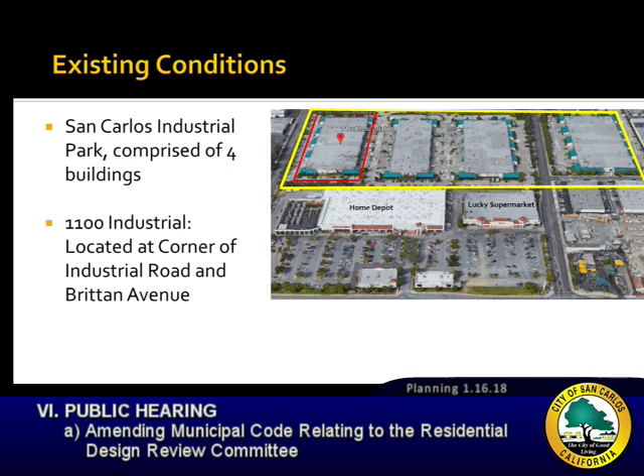The general plan designation is planned industrial, which allows for a variety of light industrial and flex uses. The zoning for the site is a planned development zoning, established through Ordinance 988, which requires a conditional use permit for recreation uses.

Surrounding land uses include industrial and commercial uses, and the surrounding zoning is general commercial and industrial, as well as planned development.

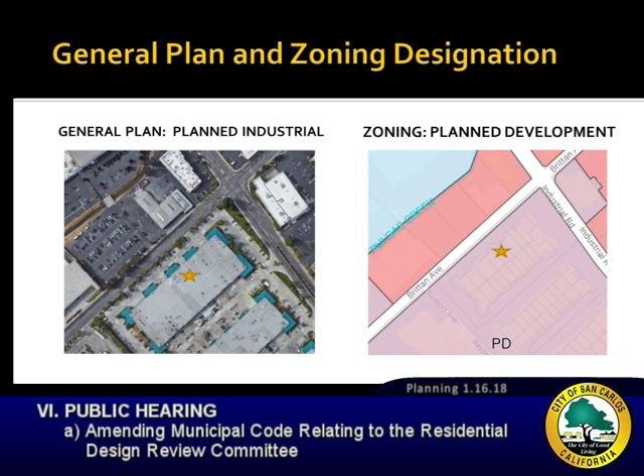King's Camps and Fitness is a fitness facility for youth and adults that has been operating in San Carlos since 2013. The business was previously located at 837 Industrial Road and is relocating due to the upcoming construction of the development known as Meridian 25.

In terms of hours of operation, most classes either occur early in the day or late in the afternoon, primarily in the morning between 5:30 a.m. and 7, and in the evening between 4:30 and in some cases going till 6:45. One of the classes does occur in the middle of the day, and that is a class for kids that generally involves parent drop-off.

The weekends are available for parties, which have the most people attending. The number of employees does vary depending on the particular class, but can range from 1 employee up to 5 for larger parties on the weekends.

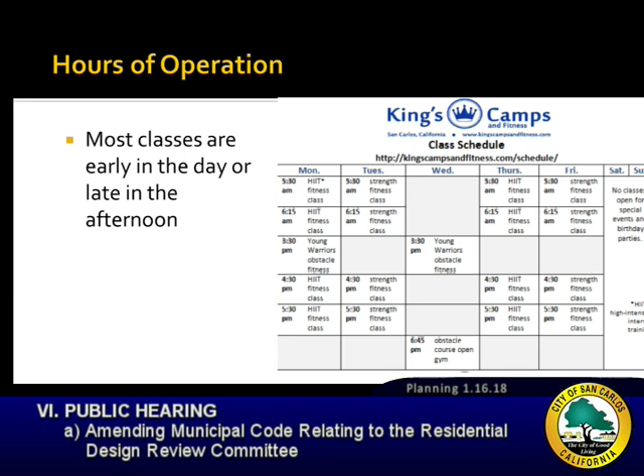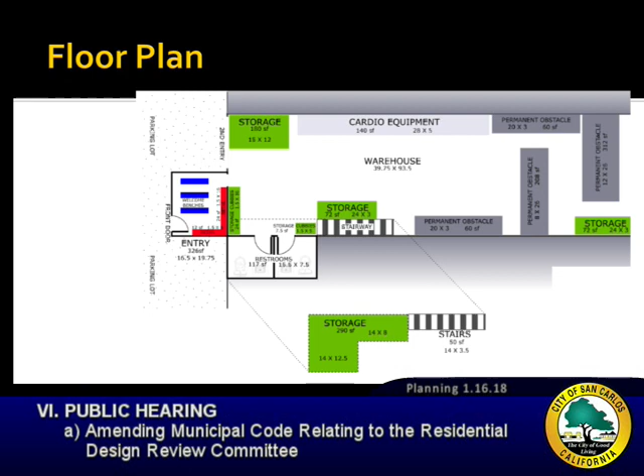As mentioned before, obstacles are used as part of the program. Some of those are permanent, attached to the floor or ceiling, and others can be broken down. The floor plan shows the various areas broken up into storage, workout areas, and the obstacles themselves.

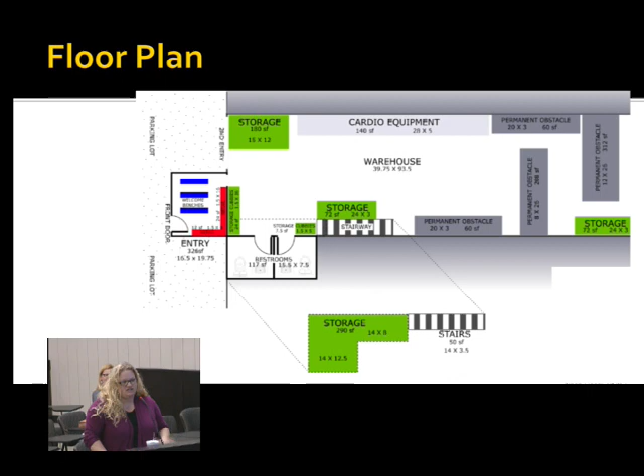I wanted to point out, and can go over the specific condition later in the presentation, staff is recommending a change to one of the conditions in the use permit, condition number 3. That condition originally required all uses to occur indoors. In speaking with the applicant, they do sometimes go for runs in the neighborhood, so staff is proposing a change to that condition, and I'll go over the specific wording of what we're recommending as part of the motion.

Parking for the San Carlos Industrial Park was originally established in 1988 as part of the planned development. In 2007, to clarify parking requirements, the owners consulted with the city and prepared an amendment, which was then recorded against the property. The document was approved by the city and replaced the original parking requirements.

This parking plan assigned a set number of parking spaces in specific locations to each unit regardless of the use. The parking plan also established a significant number of visitor spaces for use by the owners, tenants, or guests.

Since 2007, the Planning Commission does not have any records of any concerns that have arisen because of that new parking agreement.

Per the parking plan, for this space, there are 6 dedicated spaces and 40 visitor spaces allocated specifically to 1100 Industrial.

While most classes occur early in the morning or late in the evening, one class does occur in the midday, involving approximately 7 to 12 children. As mentioned, parents typically drop off their children for this class, so parking would not be as impacted as were it an all-adult class.

The early morning and late afternoon classes, frequented by adults and more likely to have cars parked on site during class times, occur primarily outside of regular business hours. Staff did visit the site at various times to observe parking, and at each visit, staff did observe open parking throughout the site.

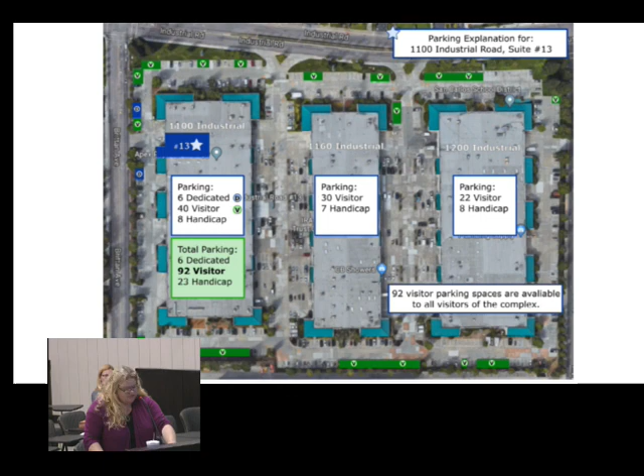Staff finds that all the required findings can be made to approve the request as outlined in the staff report. The proposal is consistent with the governing ordinance and the general plan, which encourages diverse and flexible uses within the east side of the city. The specifics of the business, including amount of employees, hours of operation, and number of clients, are all compatible with existing uses in the area. Specifically, a majority of the activities occur outside of standard business hours. However, as with any use permit, the Planning Commission can re-review this item if any negative impacts occur.

Staff did notice this item by sending it to property owners within a 300-foot radius, as well as publishing it in the newspaper, and has not received any comments as a result.

This is the formal motion, should you wish to approve the item. At the end, you'll see the revised motion that staff is recommending, which would read: no business activities shall occur within the parking areas of the San Carlos Industrial Park.

So as an example, if the classes wanted to walk to the street, to Industrial Road where there's a sidewalk, they could use that for running if they so chose. Staff is recommending that the Planning Commission grant the use permit, and I'm available for questions. The business owner is also here as well.

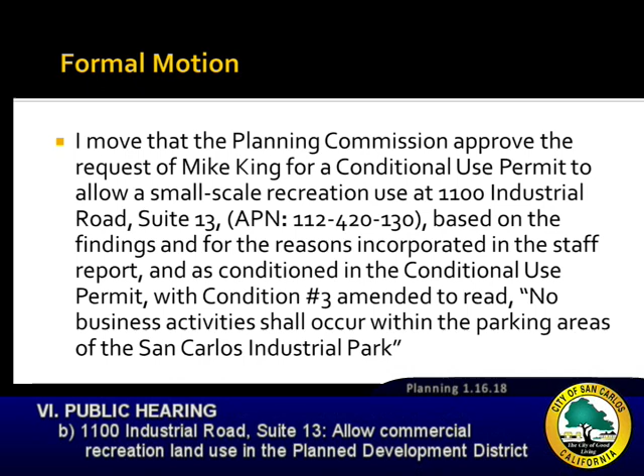Thank you. I have one question. Have there been any complaints, either parking or noise, with this business at its current location at 837 Industrial? Not that we're aware of. Okay. No. Thank you.

Any other questions for staff at this time? Was it the intention, I see in condition 1 that the use has to be as described in the report. Was the intention that the hours couldn't change without coming back to the commission? So the intent is that minor alterations to the description could occur, and whether those were considered minor and could be approved by the community development director, that would be decided by the director. A larger change, the director would refer it to the planning commission. So minor changes to hours, I would say, would not come back.

But if the hours, for example, changed from 5:30 a.m. to 7 p.m. straight, like we've seen with other commercial recreation where they're just open all day, that would constitute a significant change, I would imagine. And of course, if there's any other impacts or concerns that come up as the business starts operating.

Thank you. Does the applicant wish to be heard or have a presentation? Do you mind just coming up to the microphone? Good evening. No, nothing, no presentation or anything. Just want to introduce myself as Mike King, the owner of King's Camps and Fitness, and open myself up to questions if you have any.

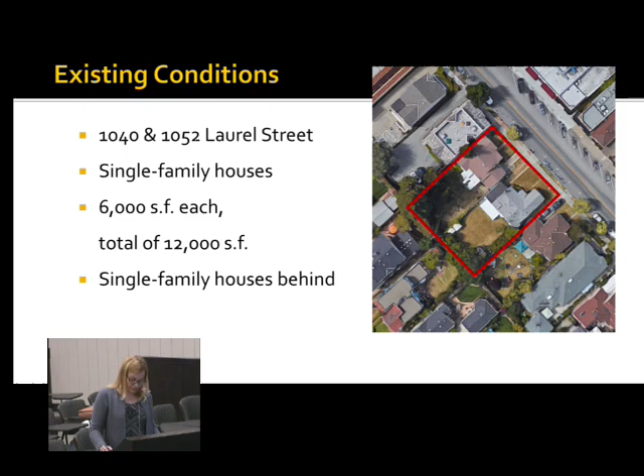The project site is at 1040 and 1052 Laurel, 2 lots, each currently with a single-family home on an area of 6,000 square feet, for a total project site of 12,000 square feet. Single-family homes are located directly behind the project. The general plan classification is mixed use, low density, and the zoning is neighborhood mixed use. They both allow up to 20 units per acre.

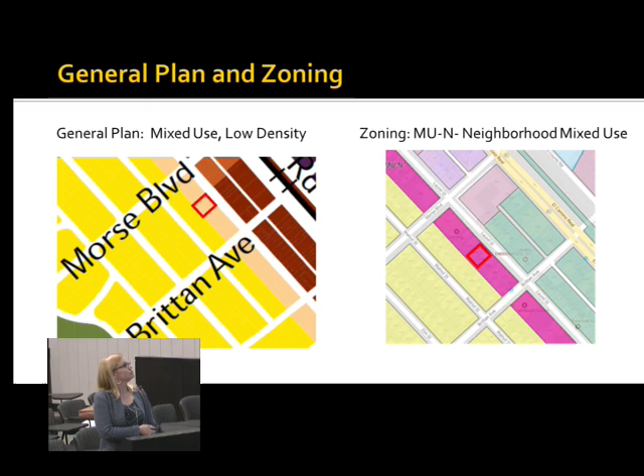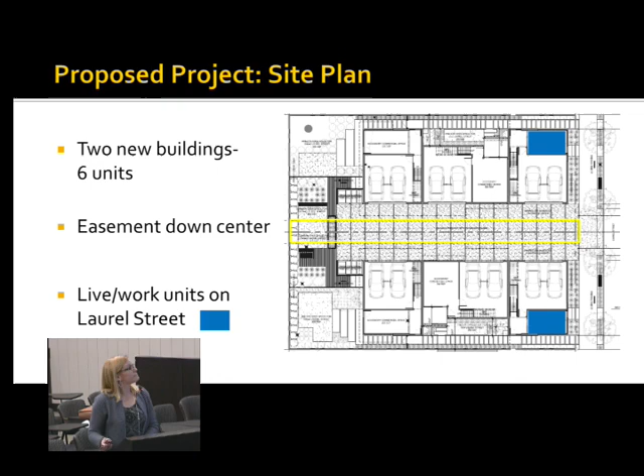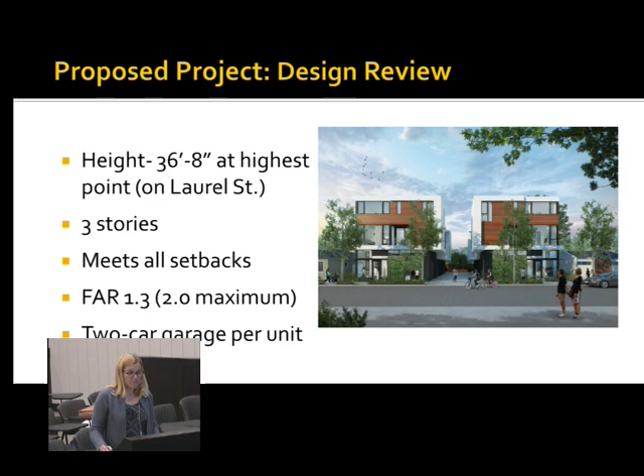A little bit about the design and development standards: the design is 3 stories with a height of 36 feet 8 inches on Laurel Street, though shorter at the rear. The project meets all setback requirements and includes a 1.3 FAR, where 2.0 is the maximum. Each townhouse would have a private 2-car garage, which meets the municipal code parking requirements, and each garage is designed with room for bicycle parking inside.

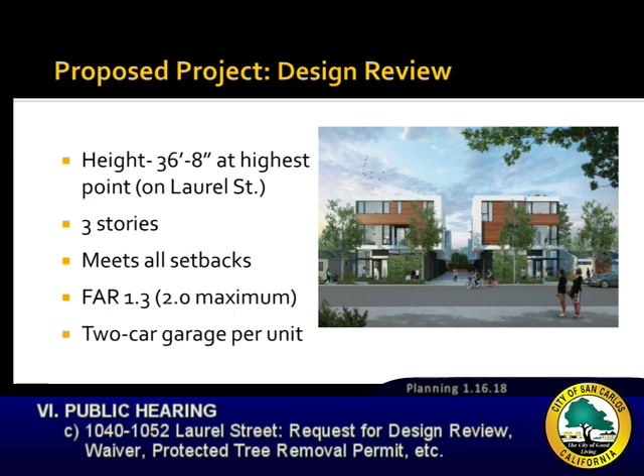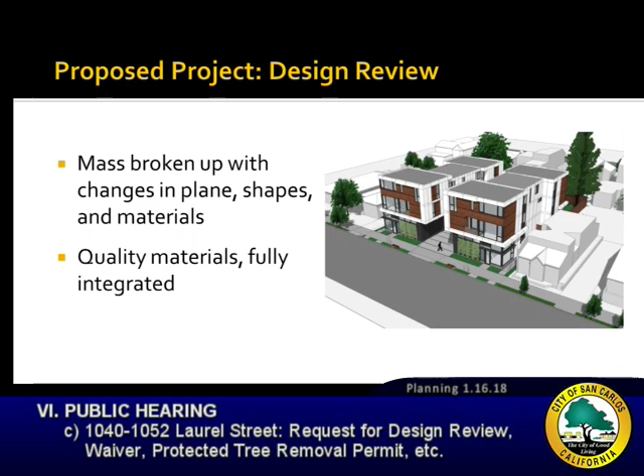In terms of design, the mass of the buildings is broken up with a change in plane and a projecting design element at the front facade, the C-shaped white element that comes forward, along with a couple of different materials. The primary exterior materials include cement board in white, cement board in charcoal, and horizontal wood board. We have samples if the Commission would like to see them. We haven't used cement board too often in the past, so I wanted to draw attention to that—it's not just plaster in place, it would be those board materials.

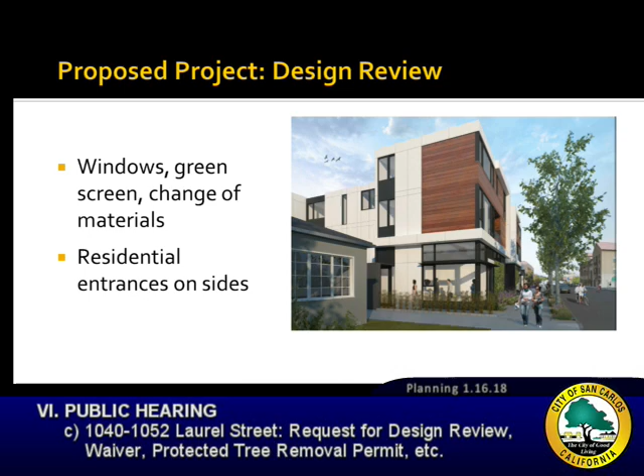These primary materials are integrated around all 4 elevations. On the Laurel Street elevation, there are windows, a green screen with plants, and low landscaping to create a welcoming frontage for pedestrians. Entrances to the units are located on the sides through an architectural archway feature. This is the rendering of the ground floor looking down Laurel Street, with the live-work spaces at the front.

The proposed landscaping meets the municipal code requirement of 20% of the project site, so 1,200 square feet of landscaping are proposed on each lot. There are 7 new trees proposed in total, and the redwood tree in the right rear corner would remain with the project. There's shrubs, ground cover, and succulents proposed throughout the side and rear yards, and the front elevation has a green screen planted with 2 different vine materials. There are also 4 street trees proposed.

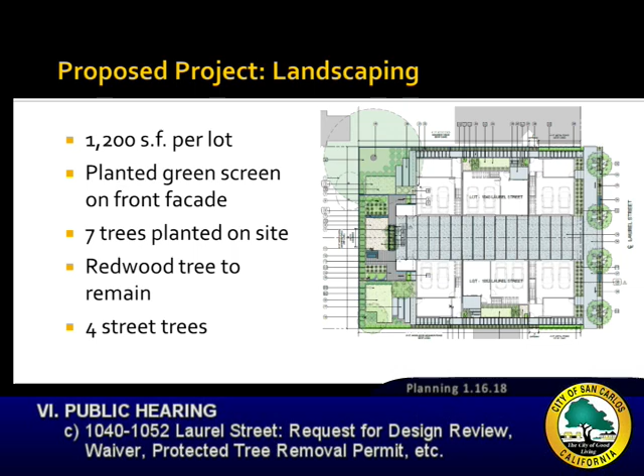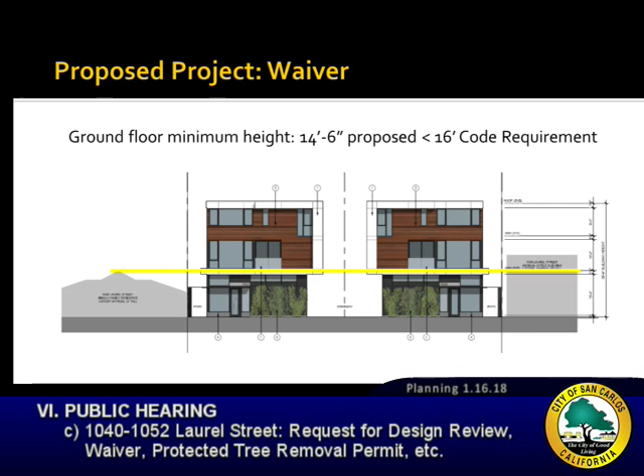The next entitlement is for a waiver of ground floor minimum height. The yellow line shows where the applicant is proposing 14 feet 6 inches, where 16 feet is normally required by the municipal code. Staff is supportive of this waiver as it will reduce the overall height and help the building be more compatible with its surroundings. You can see the approximate location of the 2 buildings on either side in the gray blocks on the 2 sides of the project.

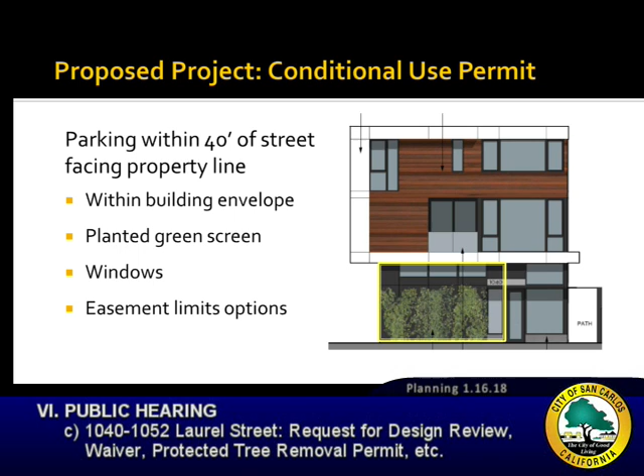Next is a conditional use permit to allow parking within 40 feet of a street-facing property line. The intent of the code is to minimize the visual impact of parking. In this diagram, I put a yellow box around what's actually the side of the private garage, so when a car pulls in there, that's the part we're trying to minimize impact on. In this case, the parking is fully enclosed within the building envelope, and it's further minimized with the green screen, windows, plants, and clerestory windows across the top. All of those design elements would keep people from knowing there's parking behind there. Additionally, because there's an easement down the middle of the site, there was not an opportunity to locate the parking anywhere else on the site or to go underground.

There's a tentative map proposed for condominiums. All of those requirements and conditions of approval are standard, so I won't go into detail here, but if the commission has questions, I'd be happy to take those.

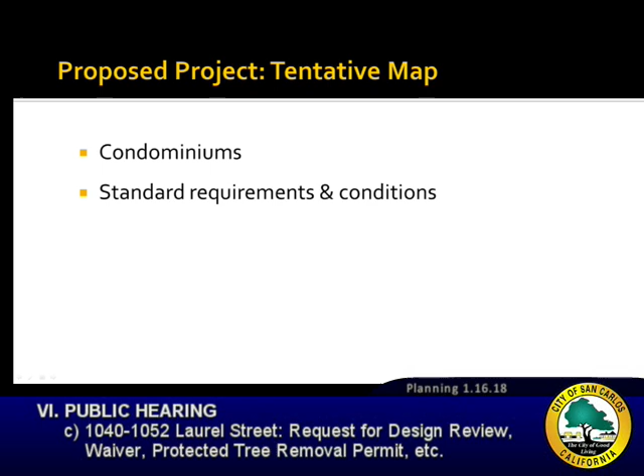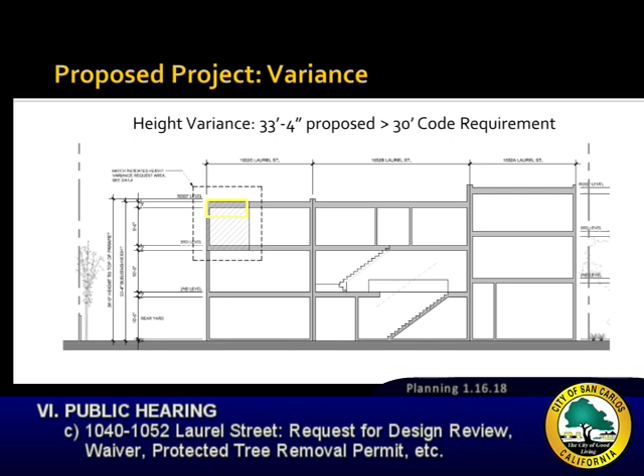Staff is supportive of the variance, and the staff report includes the basis for the findings. Notably, the project site has a storm drain easement running down the center, which is a unique physical constraint not applying to other sites in the zoning district, and it limits the type of development possible. The variance allows the townhouse-style development that increases compatibility with surrounding properties. Neighbors were also supportive of this townhouse style of development, which relies on the variance to be feasible.

We're trying to advance the slide, just a second. Because it's trying to load something else, maybe. Yeah, that's great. Thank you.

Thank you. So turning now to tree removal, the staff report says that there are 11 trees on site, but that's actually a minor error. I just wanted to make sure we're clear on what's in the arborist report.

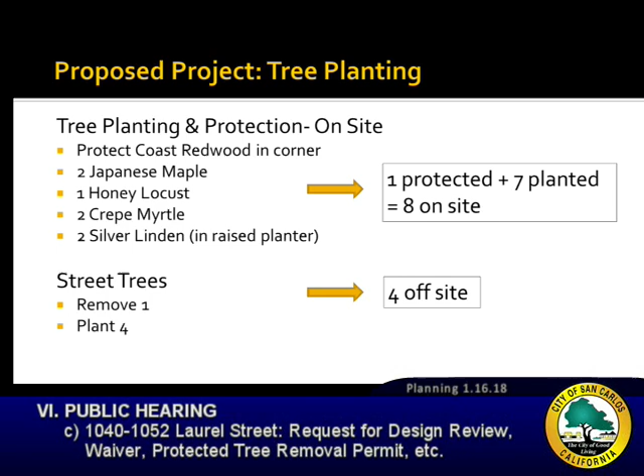So what's on the slide here? Sorry, back one. Here we go. This is what we need.

The arborist report includes one tree that's actually legally on the adjacent property, but very close to the property line. So on site, there are 9 trees, with 1 on the adjacent property and 1 street tree, totaling 11. The proposed tree removal includes 3 protected trees, 5 trees that are not protected per the municipal code, and 1 street tree.

Doesn't, no, I don't think so. Should I continue this and we'll come back? Or do you want to talk about it further? I can wait. Okay. It's very possible, but I counted many times, so I think we can get it sorted out. All right.

So here's the proposed tree planting, and all of the trees would be 24-inch box size. First, on site, the redwood tree at the corner would be preserved and protected. Then they propose to plant 2 Japanese maple, 1 honey locust, 2 crepe myrtle, and 2 silver linden in raised planters over the easement. That's a total of 1 protected tree staying in place and 7 planted, for 8 trees. You're checking my math again - no, this math works. Oh, good.

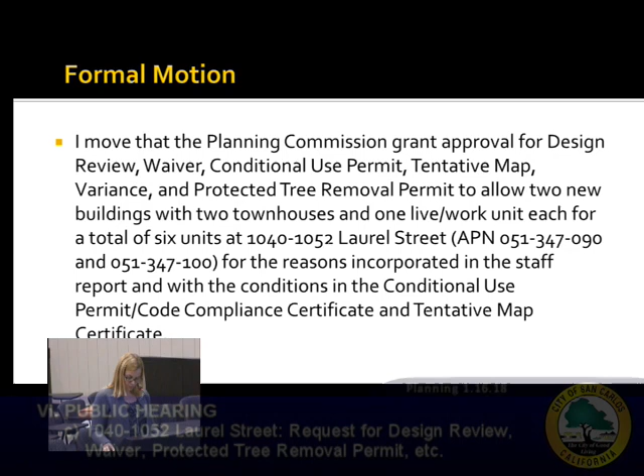The majority of the conditions of approval in your packet are standard, but I wanted to point out a couple of the unique ones this evening, or the ones related to some of the neighborhood concerns that came up through the review process.

Starting on packet page 45, condition of approval number 13 is related to lighting, and we do have a standard condition for lighting, but staff strengthened the language on this one due to neighbor concerns about potential spillover onto the single-family neighborhood. Conditions of approval 21 through 23 are unique conditions specifically related to the live-work component. Number 24 is a condition for tree protection for the redwood tree that's going to remain.

Number 26 requires a construction notice to neighbors to the satisfaction of the building official. Number 27 is about potential safety enhancements at the driveway, where it crosses the sidewalk on Laurel Street. These were recommendations from the applicant's traffic engineer who analyzed the on-site circulation conditions. We've integrated those as a condition of approval, with the final design to be determined by the city engineer and the community development director's satisfaction when we go into the building permit plan check phase.

So if the commission wishes to approve the project, this is the motion that you would make. I'd be happy to try to answer any questions or to go back and talk about trees if we'd like to do that. And then the applicant has a presentation as well. Thank you.

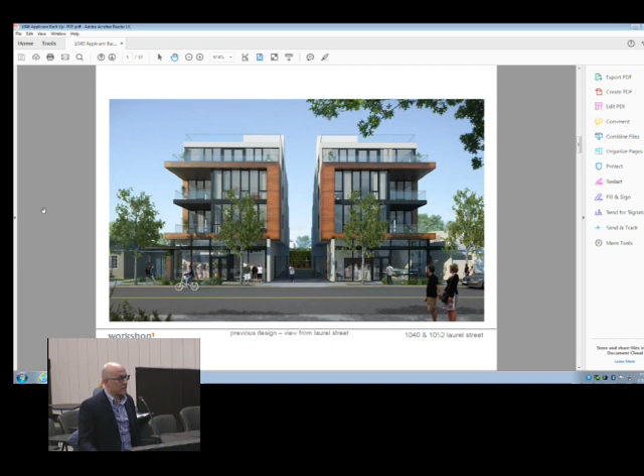In working with staff and our neighbors, we resolved to approach this as a live-work style concept, where an owner would buy a townhome that would also house a small business, as you see in live-work spaces throughout San Francisco, Oakland, and other parts of the Bay Area. We think Silicon Valley is a great place for that kind of product, for 2 of the 6 townhomes.

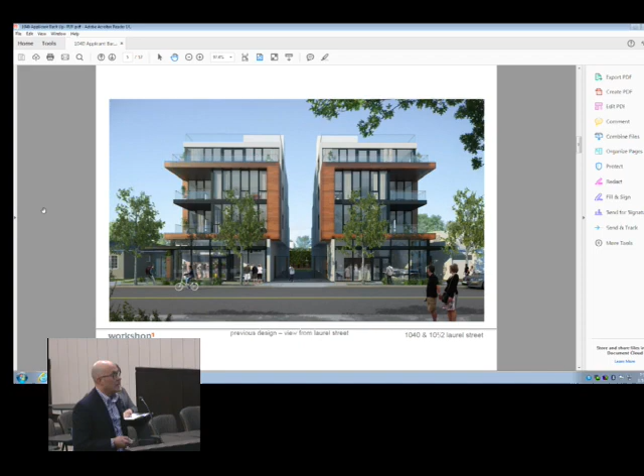What we concluded is that we could take a big haircut off the building, reducing it from 4 stories to 3 stories, down by approximately 16 feet in the rear of the site. It's a little taller in the front, resulting in a project that's much more compatible with the surrounding single-family homes.

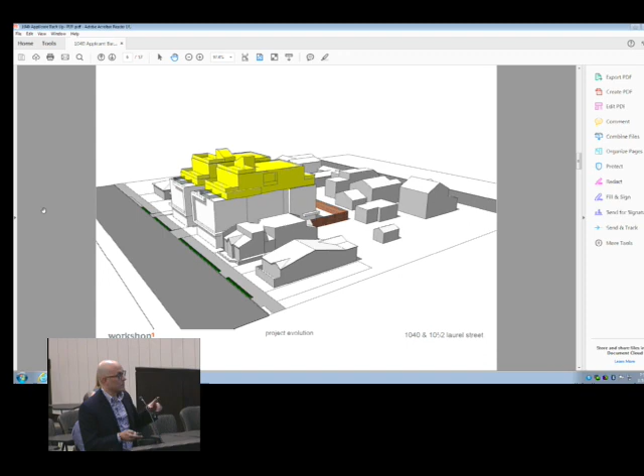This set of diagrams shows the evolution of the project. In yellow is the haircut, and the lower mass in white is what we're left with. In PowerPoint I would have toggled through three different animations, but unfortunately I can't do that with the PDF. Still, that's effectively the haircut we took off, while still maintaining the residential program, which is the key component for us.

On the landscaping front, we worked a lot with our neighbors through individual meetings and emails to identify their interests regarding the intersection between our property line and theirs, and how we deal with existing landscaping that might overhang the property line or impact them, and vice versa. The big concern was the giant redwood tree, which we've taken measures to design the landscaping around appropriately, to protect it during construction and preserve it.

It's an amenity to everybody. Our neighbors behind us have a couple of bottle brush trees that we'll be preserving, irrigating, and pruning, doing everything to help maintain their health.

One of the benefits of the townhome approach is that the rear yard landscaping is generally private use for the two adjacent townhomes. There's a small shared area behind the driveway, just a small space to recreate. We replaced the original design, which had a completely common-use rear yard, with one that's more privatized and compatible with the adjacent single-family homes.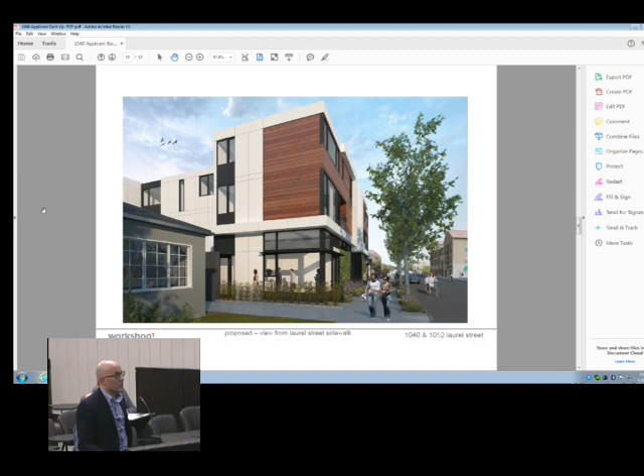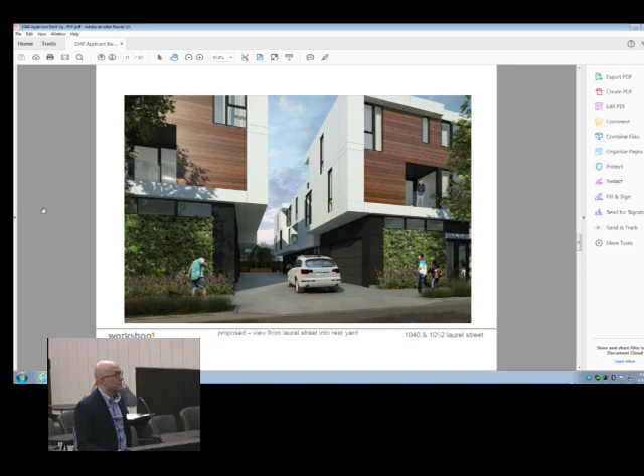Here's a view looking down Laurel Street. We saw this view earlier of what one of these live-work spaces would look like, with the residential entry gate pushed back to the left and a heavily landscaped sidewalk and pedestrian path. And again, a view looking down the driveway. I think that's it for the slides.

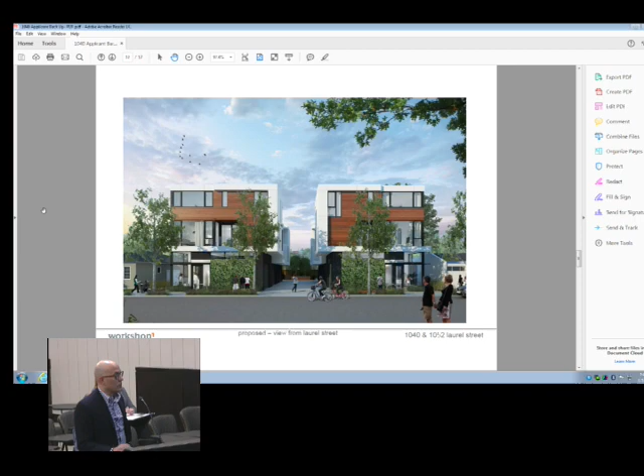Regarding materials, did we hand out the samples? As an architecture firm, Dragonfly doesn't like to use traditional stucco, which is finished in place, takes a long time, and often requires painting or is prone to cracking. Instead we use a cement panel, a product that's been around a while but is becoming very popular, with a factory finish that's essentially lifetime, doesn't need repainting, doesn't fade, and doesn't wear.

If you ever need to access the building, you can remove it, avoiding scaffolding going up on a project that's nine years old with months spent chipping off stucco and replacing it. So we do like it as a material—it's smooth, high quality, and quite beautiful.

The other product we're looking at is this wood board, a factory-treated wood that's not susceptible to rot, fading, or the other maintenance requirements needed to keep wood looking like wood instead of turning gray and cupping. So it's what I'd call almost an engineered wood, but it's 100% solid wood.

What they do in the factory is bring it up to a very high temperature and basically petrify it, to cook out anything that pests and infestation would want to come and get. That's the product you see in front of you. There are quite a few of those on the market, and that's the type of wood we're looking to use—something very low maintenance, so that the project 10 years from now looks like it did on the day it was built.

Yeah, I can tell you some of the ways we do deal with these things. For this project, as we get into the building permitting phase, working with city staff, Public Works, and our transportation engineer, we want to further develop those plans to identify exactly how we'd address this. Often it's through lights, audible warnings, paving, mirrors, or similar measures. It could also involve how we treat the landscaping within our setback from the property line, to not clip the view and maybe open it up more. The exact ways we'll implement those, it's early for me to say at this point, but safety is a fundamental concern of ours in all respects, whether structural code, fire safety, or pedestrian safety.

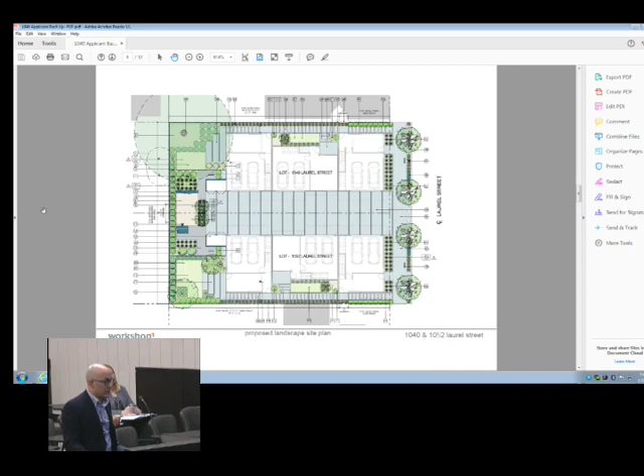Is there an elevator in this? No. So one of the things the townhouse approach afforded us is eliminating a common elevator, common lobby, and common egress stairs, which really allowed us to take away a huge amount of the mass and square footage of the building. So everything is privatized.

Thank you. Did you investigate solar panels on the roof? I don't see them in the renderings. Thank you for bringing that up. One aspect of the project I didn't delve into, but we're happy to, is the technology and innovation we want to bring into construction, whether it's solar or anything else. I'd be happy to have Amit join me to talk about that.

On the roofs, we are looking at solar electric. We're looking at a lot of different potential things to deal with that. We're trying to create projects that are zero net energy and reliant on electrical energy, because that's more sustainable than using gas appliances. There's a lot of great innovation in the electrical appliance world, whether it's induction cooking or water heating done through heat pumps versus gas or purely electric. If you want to hear more, I'd be happy to bring Amit up.

Thank you. Not now, but later, maybe.

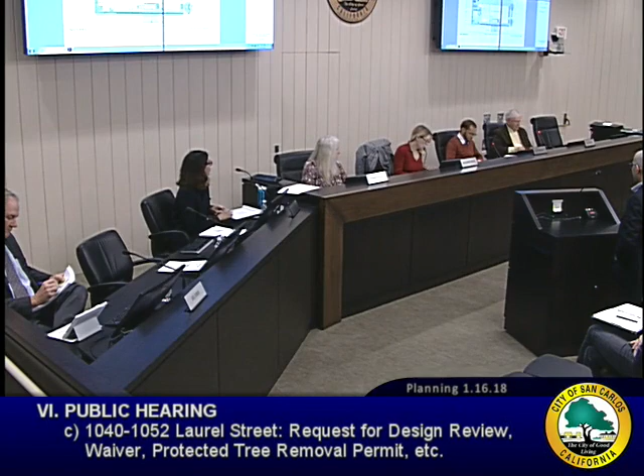I appreciated the summary of the process that you went through with the neighbors to come up with the redesign, and I have read the letters of support as well. I'm curious, are there any concerns you were not able to address from the redesign? Not that I'm aware of. Okay, thank you.

Any other questions for the applicant at this time? I'll just say this, it's been over 50 years since I got out of architecture school, and I've never seen a better set of drawings, Mike. Thank you, that's a compliment. I know, thank you very much. I appreciate it, it's from my heart.

Thank you. Well, I always tell my son that handwriting is everything. Work on it, make it look good, because that helps to set the first impression. There you go. So I have, thank you.

Okay, thanks. I have one speaker slip from a Stacy Niewood. Impossible to spell, easy to say. One more time? Niewood. Hi, my husband and I are the authors of that very, very long letter that everyone received.

First, I would like to thank Laura for helping answer all of our questions through the process. And also really would like to give my hats off to Mike and the Dragonfly crew. It's somewhat intimidating when you buy a house with your entire life savings and 50 feet's going up in your backyard. So I would really like to implore the city of San Carlos to eliminate 4 floors and 50 foot high buildings adjacent to single-family homes.

There is. I don't have a laser pointer, but looking in front of the parking spaces against Laurel Street, there's a door directly off the sidewalk. That space all the way up to the very faint dashed line, do you see that? Yeah, that's the area that would be deed restricted for commercial uses.

We're not installing a wall per se between that and the residential entry, which is around the pedestrian path on the side. So it gets two entrances. I see. We could put it in, we could opt to put it in later.

It could be up to the future owner. It's just a detail at this point. I decided to dash it in.

My thinking is that if I had a home business there, I don't think I would want a solid wall, I'd rather keep it all open, if maybe you have employees or something like that. So that's the configuration as you see it. The storefront itself is solid glazing, basically floor to ceiling, clear glazing, with some landscaping, the entrance door, some signage and awning and those types of things that demarcate it as a commercial use.

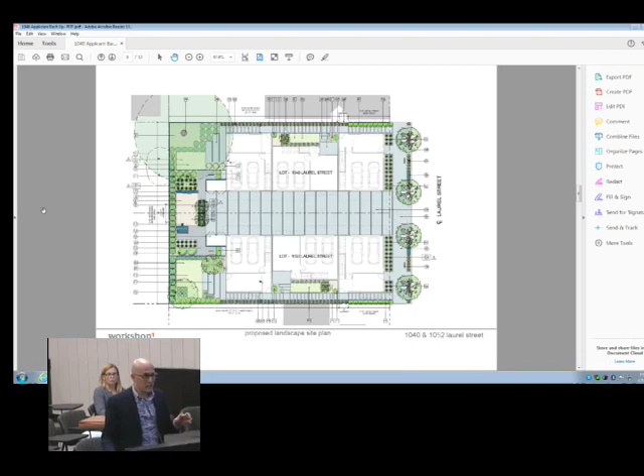About how many square feet is that? Dylan can look up the exact number. In the 200 range? 220? Yep, okay. Okay, thank you.

Ready for some trees?

So, starting with 103 on our packet, that's this one right here. So that's the tree report.

So there are currently, according to the report, 11 trees on site, is that right? It's a little bit confusing. The report originally included the tree that's on the adjacent property, and then after the survey was done, we realized it was on the adjacent property. It looked like it was on the project site.

These trees are numbered 1 through 11, they're also identified by species. Which tree is on the adjacent site? Pretty sure it's 5, which is a Blackwood acacia? Yes, it's number 5.

And when we're talking about the adjacent site, we're talking about the site to the north? Correct, the residential house, well, I guess it's a multifamily to the north? I believe it's a commercial building, but yes, the location to the north. Oh all right, it looks like apartments.

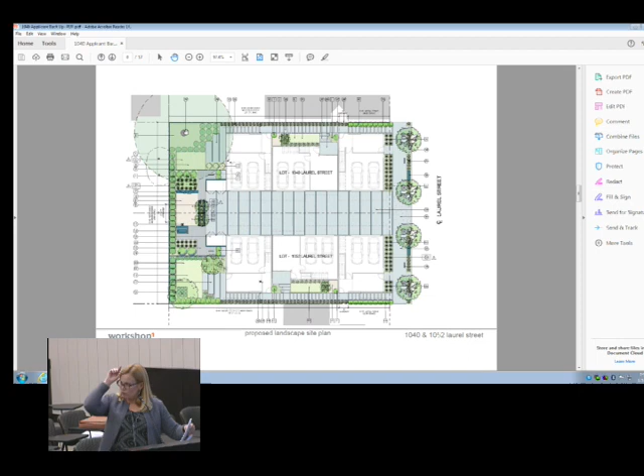And then the screening bushes, what variety are they? I don't really care what species they are. How tall do they get? No, Dylan, if you remember - I know that was something we discussed with the neighbors quite extensively, but I don't recall if we identified the height.

In my mind so far, and this would get clarified as we develop the plans more in the building permitting phase, I could see it being something like a podocarpus or a pittosporum, which I typically keep between an 8 and 10 foot height.

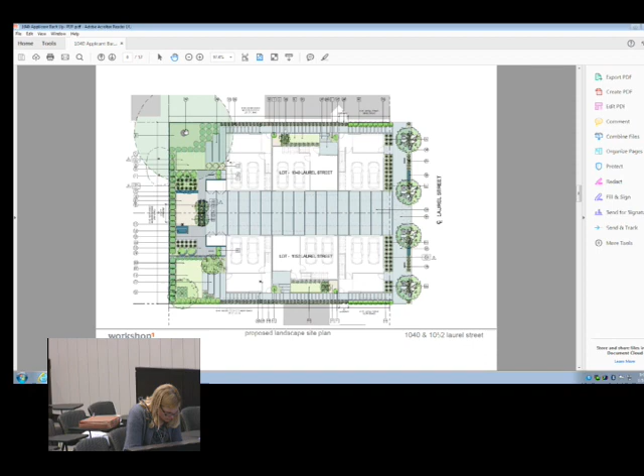Okay. And then is there a condition somewhere that requires the landscape be planted in compliance with the landscape plan? Because I looked for it and I didn't see it, and I think it's just because I must have missed it.

Where is it? It's normally integrated, since it's in the plan set, that it's approved by the Planning Commission. So we normally implement the landscaping plan consistent with your approval, subject to any very minor changes, like staff substituting a similar plant material. Sure, but where does it exist? I'm sorry, I'm just highly sensitive to this particular issue in light of what is happening across the street from my house.

We consider it integral to condition number 1, so it has to be in conformance with the plans, with tonight's date, all of the total number of plan sets, which includes the 5 landscape sheets prepared by Outer Spaces. Cool, thank you. Yeah, so we did identify, as part of that conversation, it's the fern pine that is called out, and there are height specifications for that within the packet. So they would need to plant either that or something substantially similar in order to meet that requirement. Okay, thank you.

All right, does anyone have any other questions for staff or the applicant? I do have one question for staff, and we can talk more in detail offline if it's not super pertinent, but I'm curious: the people that would buy the condo and the live-work space and use that space for whatever purpose, say they're a real estate agent and wanted their own office, would they have to go through separate business permitting? What would happen with that space, since it's not just somebody's home office stuck in their garage, right?

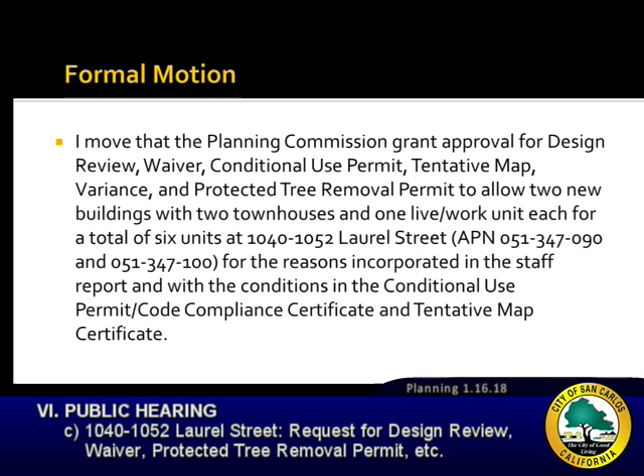Commissioner Harper Pedersen? Yes. Commissioner Bergman? Yes. Vice Chair Bradley? Yes. Chair Silberman? Yes.

Moving on to item 7, reports on recent city council actions. I don't have any for the commission this evening.

Any commission comments or planning commissioner comments or reports? None for me. No. Is there any correspondence other than the 2 letters relating to the 1040, 1052 project that were up on the dais? No, none this evening, just the 2 that you already have received.

Any planning staff comments, reports, or updates on current projects? I would just like to take a minute to update the commission on some of the progress the Single Family Home Advisory Committee has made.

Their last meeting was on December the 20th, and they worked through a number of different ideas to address single-family house scale and massing, and that material is available on the website, so I want to make sure that I announce this in case there's anyone watching who may be interested or following this, that information is available on the Planning Division website.